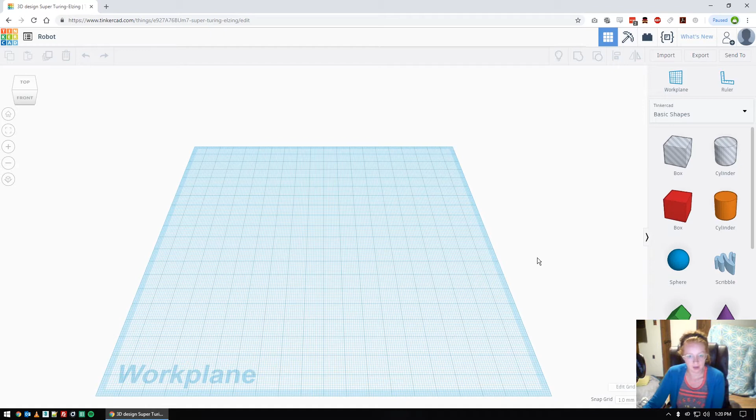So we played around a little bit last week, so hopefully you're comfortable with what it looks like. Today you're going to stick with me, and what we're going to do first is grab a box from over here and drag it onto our Workplane. It should be looking like that.

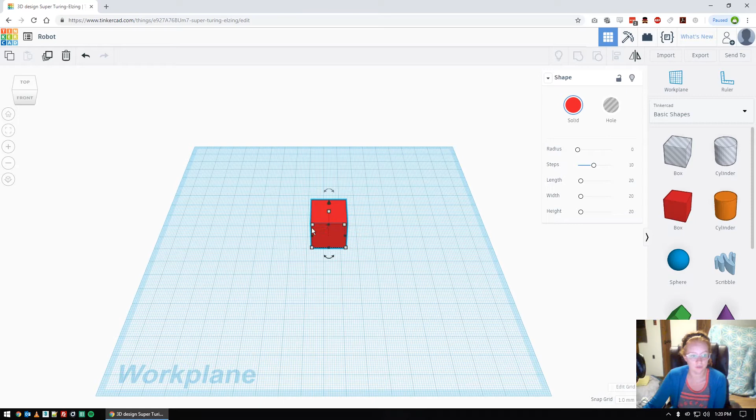We do want to resize it. So remember, to resize, you need to click on one of these little corner boxes. I click on my shape, and when I hover over, they turn red - that's how I know I'm right on top. These numbers pop up too, telling me the size. It's 20 by 20, which is 20 millimeters by 20 millimeters.

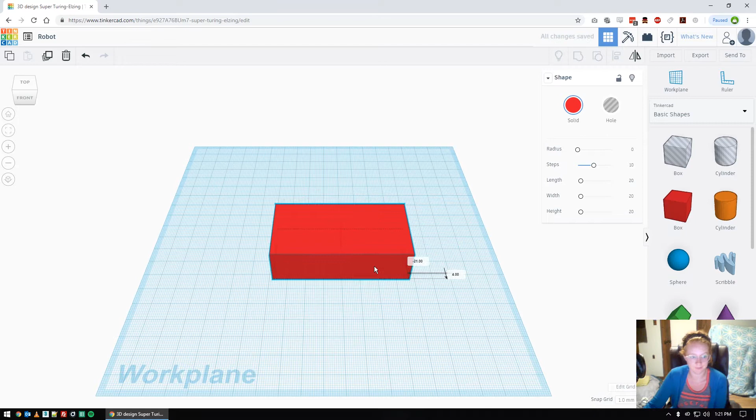So I'm going to click on my lower corner box - this is the one I chose. I click down and drag to get it to look something like that. We do not want to make it taller because otherwise our next step won't work. So don't click on this top one, leave it, and just drag the corner box.

So we can recolor it. If you remember, you just click on it and go up here to the solid and decide what color you like. I am fine with whatever color you want. I think I'm gonna go with purple - that's our school color.

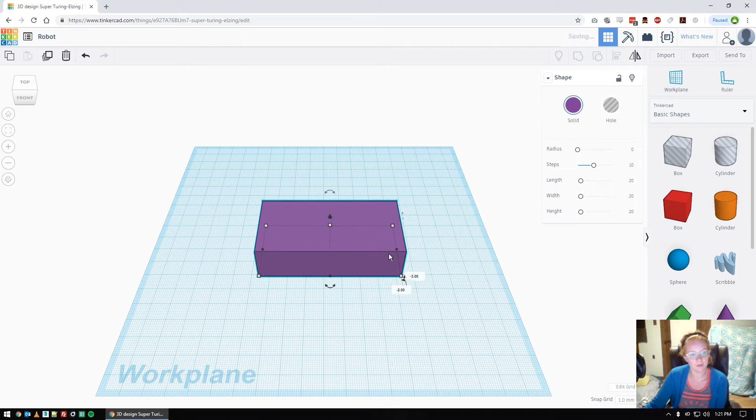Okay, so I've got my robot kind of started. Our next step is to grab another box. So grab that box from the side and just overlap it on the corner. You can tell it's overlapping because I can kind of see those little lines going through it. So be sure it's overlapping.

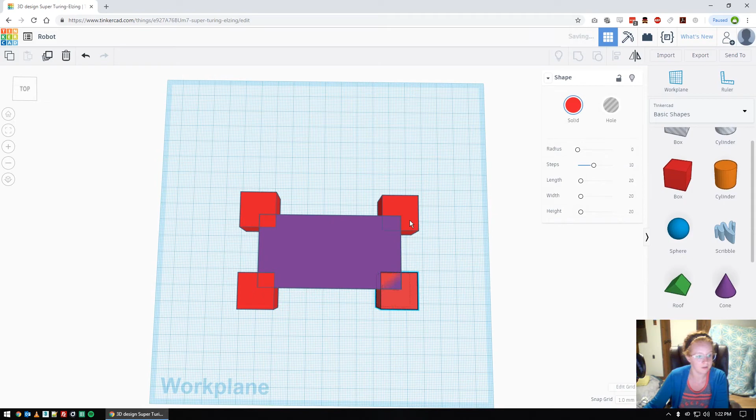And you're going to do that three times - I'm going to overlap on every corner. So grab one and overlap a little bit on every corner. Mine is overlapping just a little. I'm going to rotate it around - remember, you right click on your mouse to get it to rotate. I think mine looks mostly good, mostly overlapped. I can tell it's overlapped again because of that little line showing up. So yours is looking something like that.

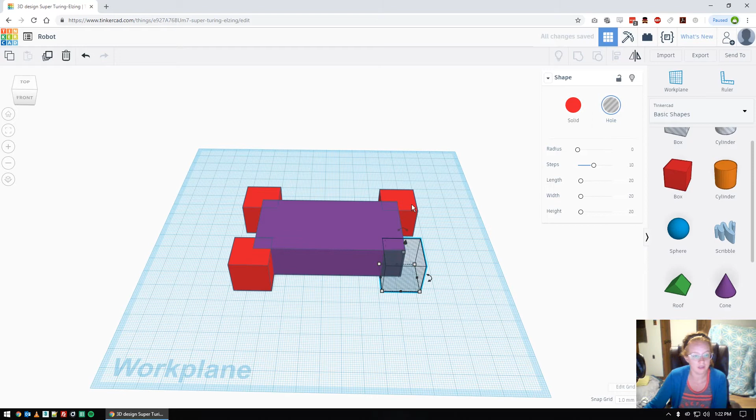Now we're going to turn those into holes. What we're going to do is click on it and go and push hole. Click on it, hole, and make sure you're clicking right on the red part. If I accidentally click on the purple and do hole, the whole thing becomes a hole, which I don't want.

So if you accidentally do something you don't want, the easiest thing you can do is go right here in this toolbar and push undo. Undo is super helpful because sometimes we make mistakes. So just push undo if something happens that you don't like.

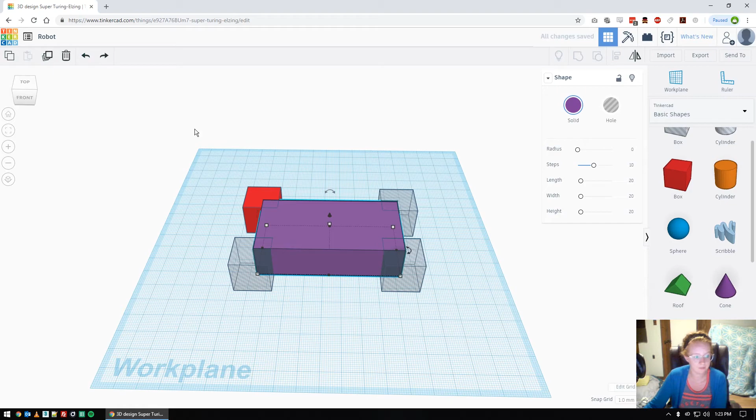So right now yours should be looking about like mine: 4 boxes over the corner that I made into holes. Maybe you notice there's also this box option that's already a hole, but I wanted to show you the longer way so that you're more familiar.

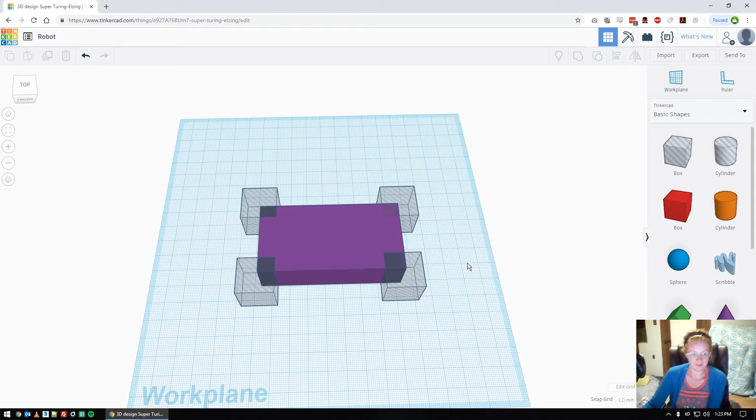Okay, so this is my favorite step. Make sure you're looking closely. What you're going to do is group it together.

So what we do is click up over here, not on top of my shapes, but off of them. When I click down and start to drag my mouse, staying clicked, I'll see this box show up. I want to make this box touch all of my shapes, so all of my shapes need to be inside of it.

So what I do is click down off my shapes and drag over top. And then when I let go, I can tell it's highlighted because there's a little blue line around my whole shape so that I know it's highlighted.

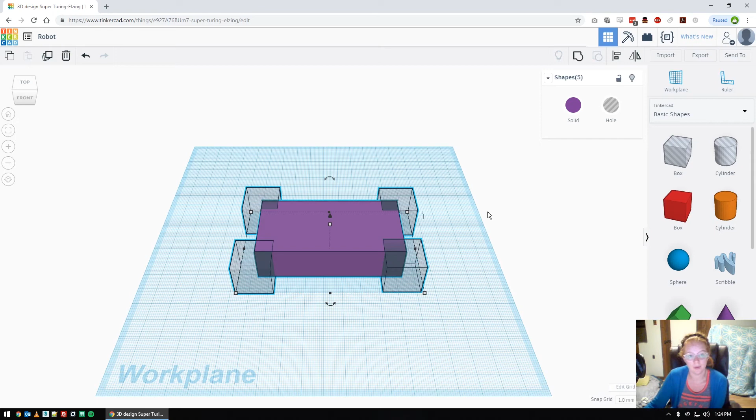What I want to do next is group it. So up in this toolbar in the upper left corner, you'll see right here it says group. You can't see it until you hover over. So hover over and you'll see group, then push that button.

When you push it, you'll see that those holes are now cut out as holes. So it's starting to look a little bit like a robot face.

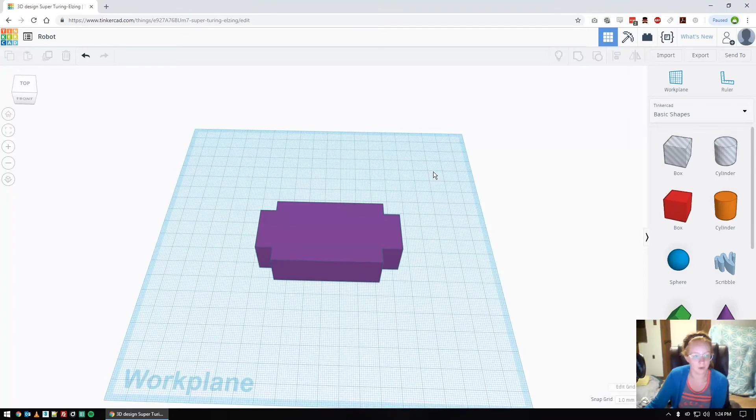We're going to add some eyes to our robot. So grab a cylinder from over here and drag it onto your work plane.

We are going to practice just a little bit of lifting. So if you remember from last week, to lift, all you do is grab this black teardrop, click down, and drag it up.

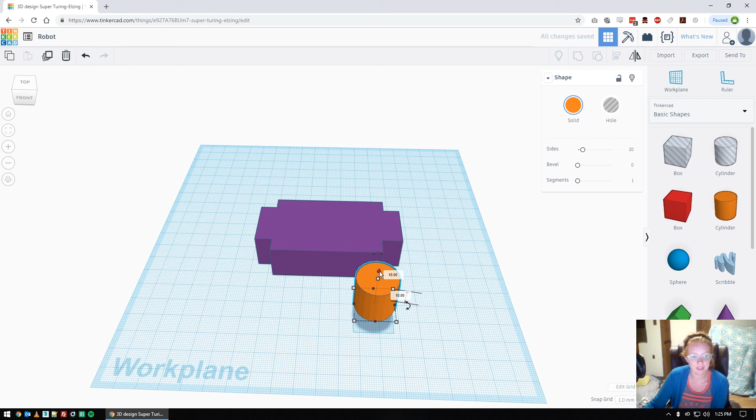Drag it to approximately 10. You'll notice those numbers pop up. Drag it until it's about 10. If you can't get 10, it's fine as long as it's close. But all I did was click on this teardrop and drag it up till it said 10.

So I'm going to position that eye about where I want it. But I want two eyes, so instead of doing all that over again, I'm just going to make sure my cylinder is clicked, then go back up to this toolbar near the undo button and click duplicate.

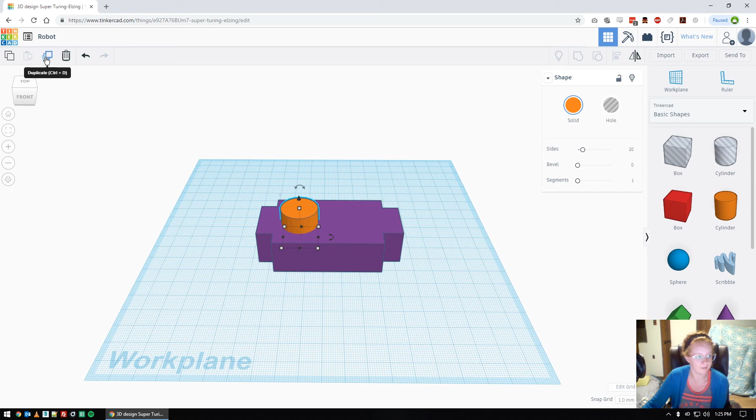And then once I duplicate, I have two, but they're in the exact same spot, so I have to drag one over to the side. Then I'm going to position my robot eyes where I want them.

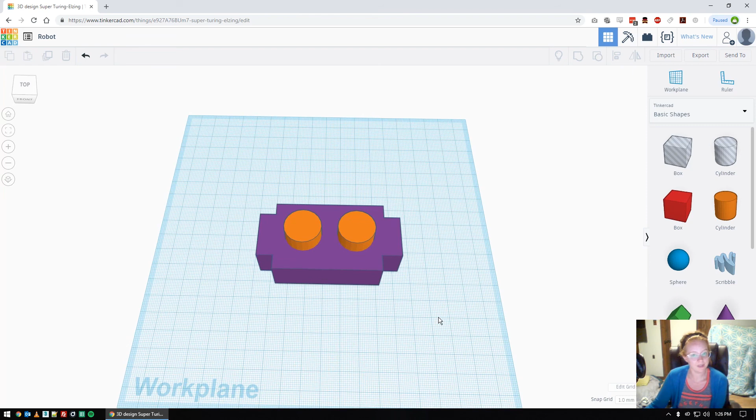Once I position my eyes, I am going to make those a hole as well. So I'm going to click on the cylinder and make it a hole. Again, make sure you don't click on the whole shape and make it a hole. If you do, just undo and make sure it's just the eyes.

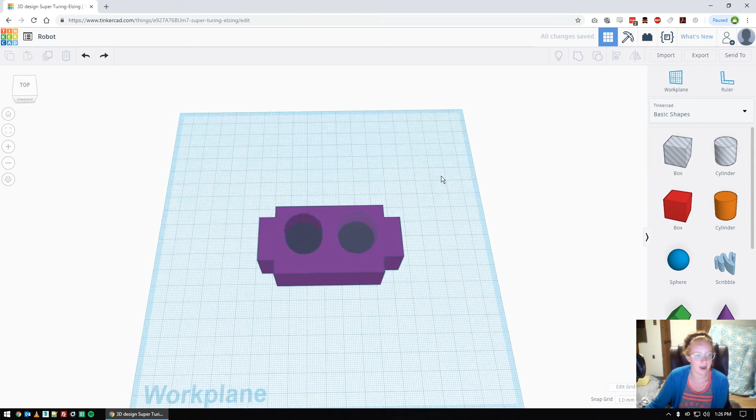Now I'm going to repeat that step from earlier where I clicked off of my shape to group them and dragged over top. Remember, you click off and drag to get that box to show up, and I put my shape inside of it. Then I let go and go back up to this toolbar where it says group, and I push group.

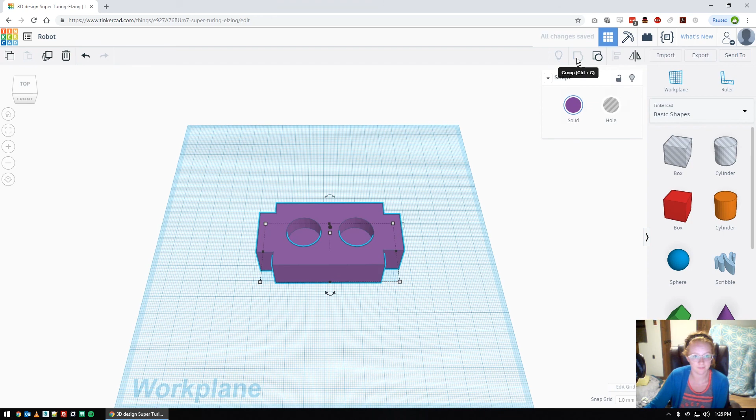Okay, so there's my little robot face for practice. I'll give you a little bit of time to work on yours, and then I'll be around to take a look.